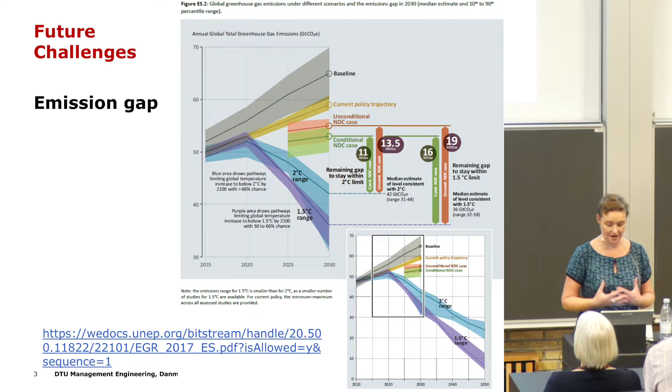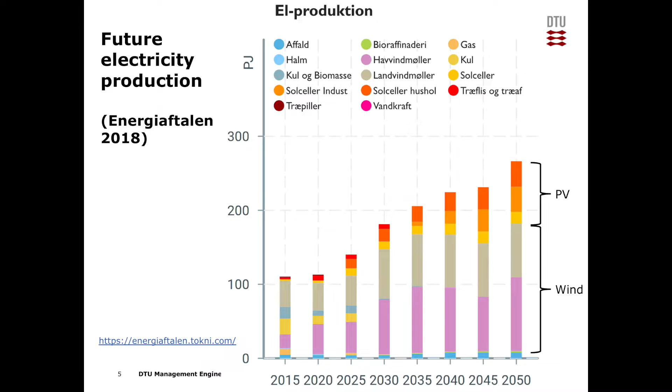When we look into the future, how are we expecting to produce our electricity? This is an example from our group's homepage, showing an analysis of the energy agreement in the TIMES model. What we can see is a lot of wind and also quite a lot of photovoltaics, i.e. variable renewable energy sources that we need to find out how to use.

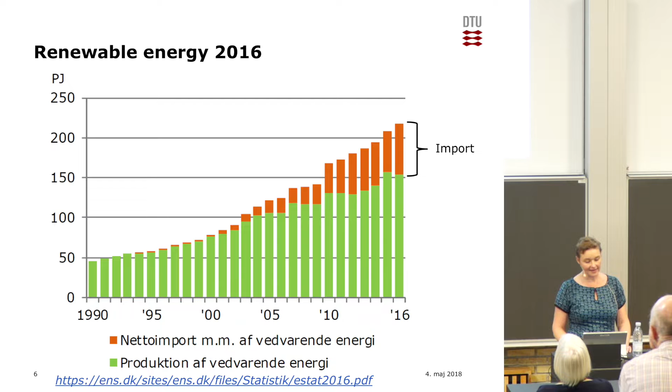Recently, we've seen quite an import of renewable energy sources, as you can see with orange. That is mainly wood. And we have to ask ourselves, is this a sustainable way to go forward? Can we ensure that the wood we are importing keeps on being sustainable also in the future, when other people will get the idea to use wood for their own purposes in their countries?

Turning towards the costs, many different studies have shown that the cost of going towards 100% renewable energy systems is not dramatically higher than the alternative costs if we don't do it. And actually, if we take health impacts into account, it may even be a cheaper solution. But let's just look at the raw costs.

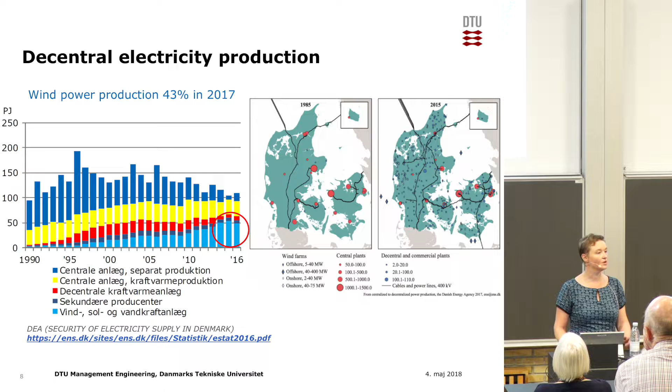I want to highlight a trend that has happened in the different sectors. First, we went decentral with electricity production. What you can see here is the change from 1985 to 2015, where we see a much more decentral production. Today, we have more than 50% produced with decentral plants, and we have a world record in wind power production with more than 40% in 2017 supplied by wind.

If we look at district heating, then we see a similar trend. There's also a very decentral production, with more than 50% produced in decentral plants. And we have another world record: more than 60% of our households are fueled by district heating.

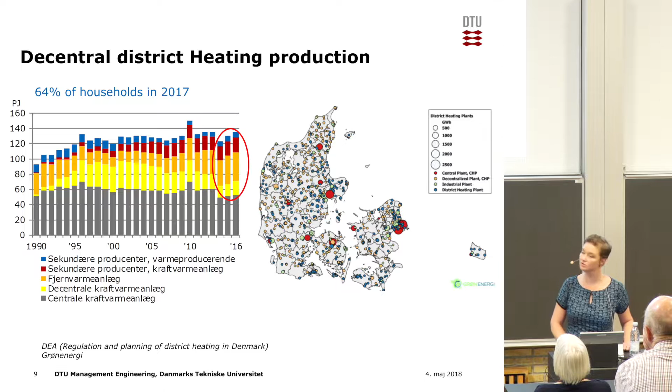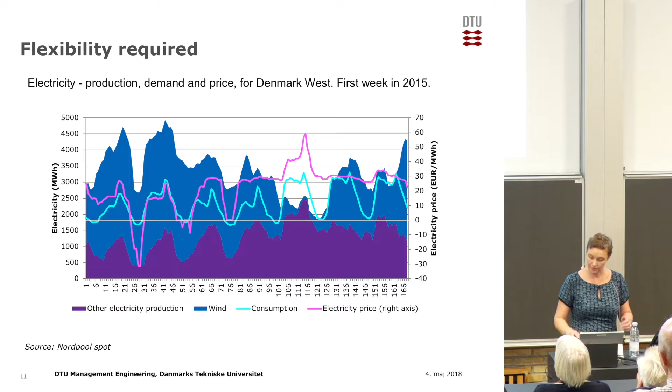In order to integrate these variable renewable energy sources, we require flexibility. This picture illustrates with dark blue the production of wind over one week in 2015, and with light blue you see the consumption. What we clearly see is that production does not match consumption, and we want to have more flexibility in the system in order to manage that.

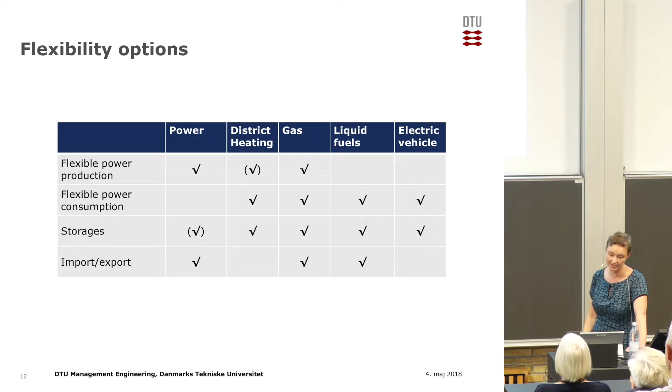We have different options of providing flexibility. We can have flexible power production, flexible power consumption, storage, or import or export of energy. The different sectors provide in different manners on these aspects. The power sector, district heating, and the gas sector can provide quite a lot on these terms, and then liquid fuels and electric vehicles can also provide flexibility on some of these issues.

Now let me take you on a trip of what I've been working with for the last 12 years.

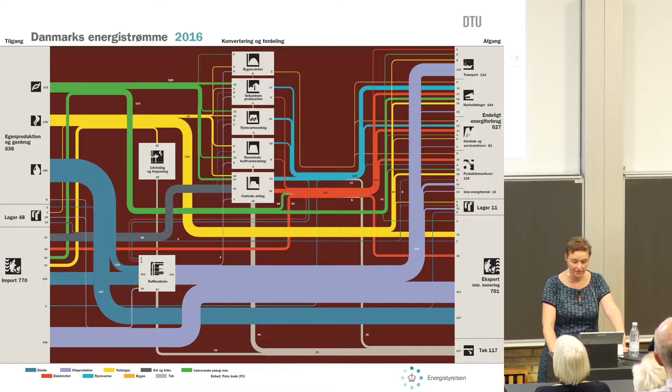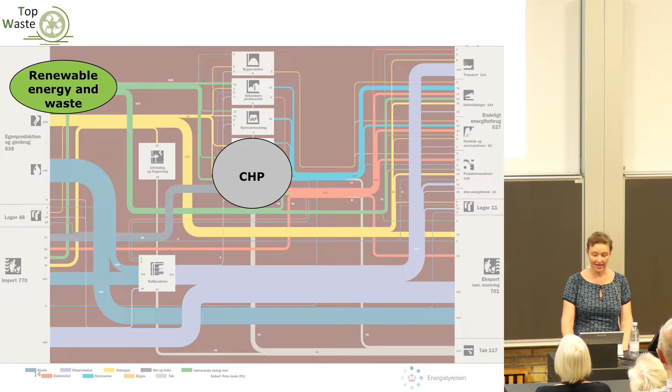Starting by looking at renewable energy and particularly waste, I have been looking at how to convert this into some useful energy, so district heating and electricity, and this has, for example, been in the Top Waste project that I was heading.

Later, I've dived more into district heating in the 4th generation district heating project led by Aalborg University, and in the progRESsHEAT project, which was a European project we recently finished. There we've been looking at the possibility of heat pumps to provide district heating cheaply and by integrating cheap electricity.

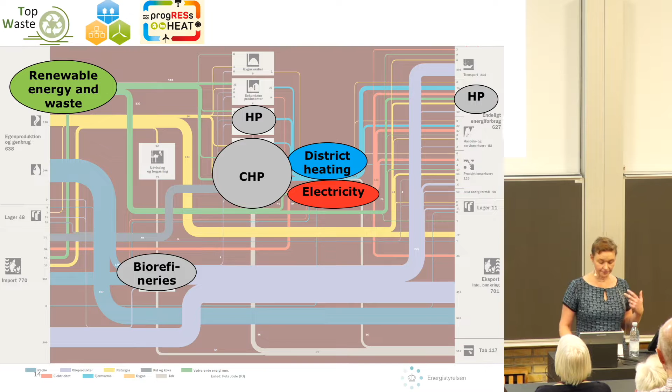Later, I was also looking at how can we convert biomass and waste in biorefineries to feed the transport sector, and this has, for example, happened in the COMETS project.

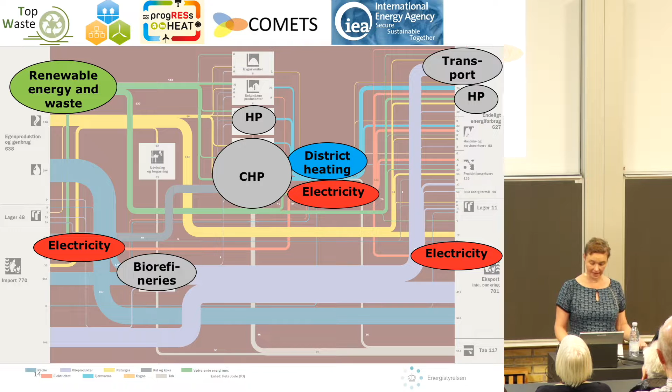And I've been looking at how can we trade electricity, what is the capacity of transmission we need, for example, in the Nordic ETP study done together with the IEA.

And then lately we've been looking into storages and also into gas and production of renewable gas in the Future Gas project. So these are some examples of what have been my focus when we are analyzing the full energy system.

When I came to Risø, a lot of brilliant people were already studying wind power, so that wasn't really where the extra help was needed, so this is where I went.

So how have I been working with this? Basically, you can say I've been doing scenario analysis, applying energy system analysis models, facilitating a dialogue about possible future pathways. So the challenges I was showing you before is that we need to integrate variable renewable energy across energy sectors. We have limited sustainable biomass available, and we need to produce fuel for heavy long-distance transport in biorefineries.

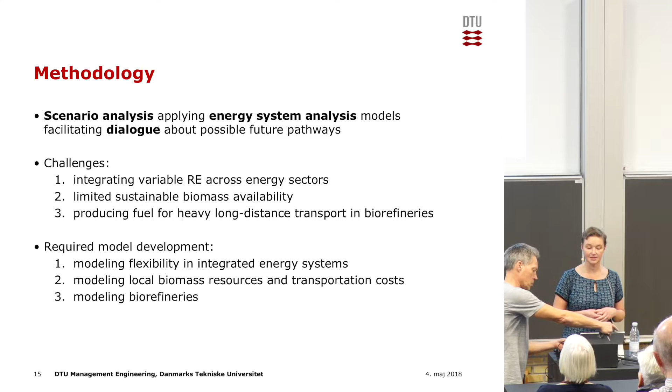So the model development that was required is to improve the modeling of flexibility in integrated energy systems, also modeling the local biomass resources and transportation costs, and modeling biorefineries in a better way.

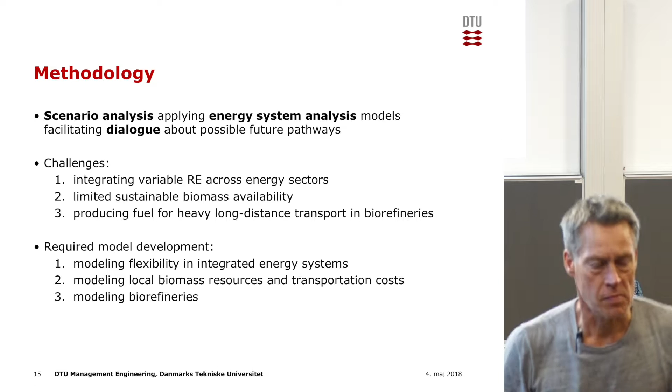So let's start with the scenarios. I like to see them as a set of organized ways for us to dream effectively about our own future. And what they do is they make a dialogue possible. So in Denmark, we have around 40 years of active energy planning, and we've been providing these scenario analysis.

A lot have come from the government, but also a lot have come from NGOs or from universities, thereby facilitating this dialogue. Where should we go?

So do renewable energy scenarios have any influence? Well, lately we've seen a lot of different analyses illustrating that we can go to 100% renewable energy in a Danish context, actually without considerable extra costs compared to a business-as-usual alternative.

And I was very happy the day that it was announced that there was a political target in Denmark to go towards 100% renewable energy in 2050. That was pretty much a milestone in my career.

And I think that all these different analyses that showed that it didn't have to be excessively expensive to go there really helped the politicians dare to make this target.

So, moving towards how am I working with these energy system scenarios? I do energy system analysis, and I like to see it as a way of combining inputs from all the different brilliant researchers I have around me.

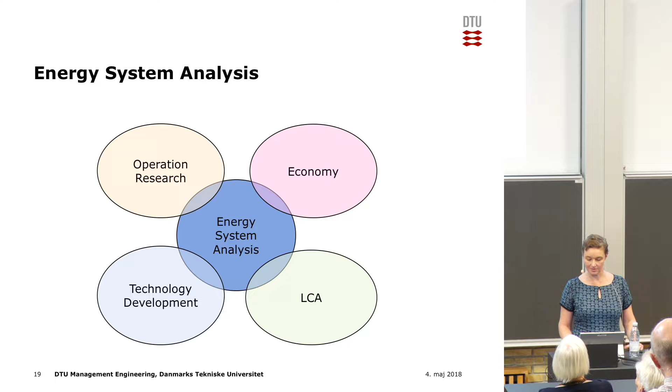And the model I've been mainly working with is Balmorel. It's a model which has been applied at a global scale, but that's not the reason why I chose to work with it.

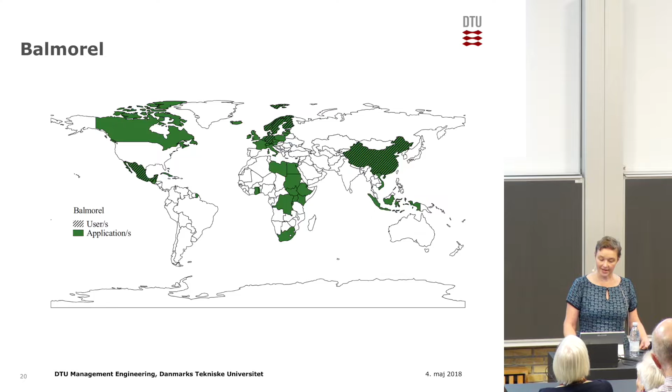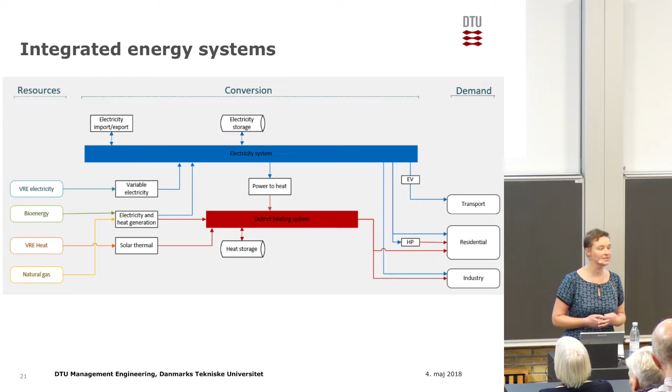I chose to work with it because it was a model that had a good representation of the electricity system and the district heating system, partly in Denmark, but also internationally. It furthermore has the benefit that it can optimize not only operation, but also investments, both in plants and in transmission between these different electricity regions you can, for example, see here.

So what really constitutes such a model, and what is it all about? Well, we can talk about the inputs that we need to the model. These are demands, efficiencies and costs, and also the hourly distribution of demands and potential production from renewable sources. On the output side, what we are optimizing is finding which fuels we are using to produce which types of energy, and where in this system.

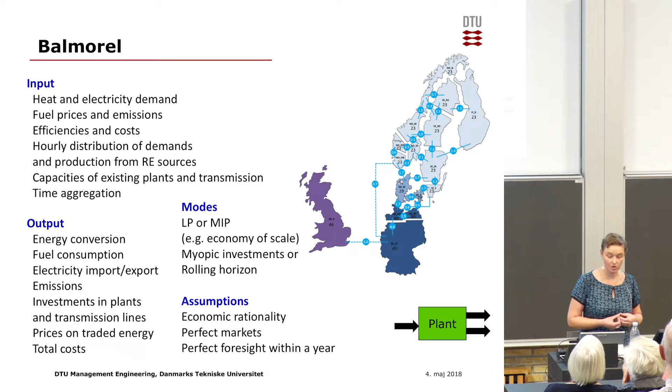The way it works is that we often use it as a linear programming tool, but it can be used as a mixed integer programming tool. For example, when we want to optimize economy of scale, and I'll come back to that, or not optimize, but take it into account. That means big plants are cheaper per capacity than small plants.

We also can use it either with myopic investments or rolling horizon. Myopic investments being we just take one year and we optimize for that year, and we are blind to all the other years around it. Rolling horizon meaning I have an idea what's going to happen five years into the future, so I do my investment and then I have an idea for the next five years, and that way I also reach 2050. This is how we normally run Balmorel these days.

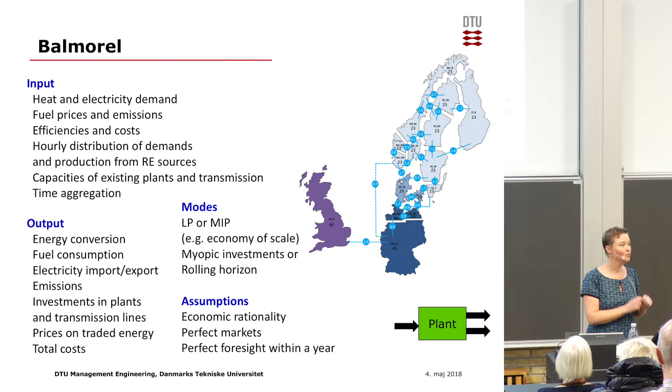Then there are some very important assumptions in this model, and this is why some people love to hate it. What's that? We are assuming economic rationality, we are assuming perfect markets, and we are also assuming normally perfect foresight within a year. That means I know when the wind is going to blow, and I also know when people are going to have their electricity demand, and that's really smart, because then I can make a super optimal system.

Also, economic rationality and perfect markets are questionable assumptions. However, this is not the final answer of how the world is going to develop. This is the first point to put on the table for a discussion to start. This is where we say this could be possible from an economic and from a technical viewpoint. And then, of course, there are human barriers to make that happen, for example.

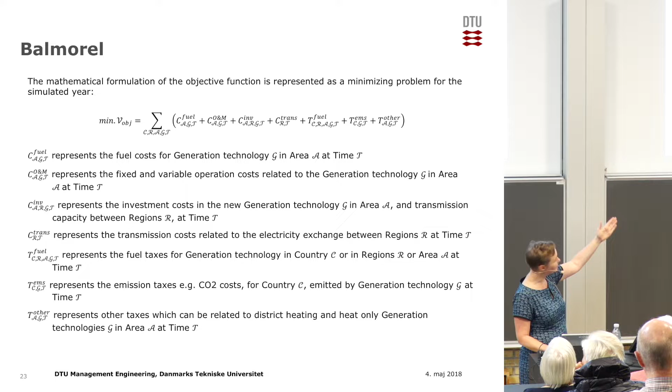So putting one equation on the board today, this is the objective function that we try to minimize. We try to minimize the costs. This could be fuel costs, operation and maintenance costs, investments, or costs within transmission. And this is if we run it in a socio-economic optimization. If we want to include private economic optimization, we can add taxes, for example, on fuel or on emissions, or any other taxes or subsidies.

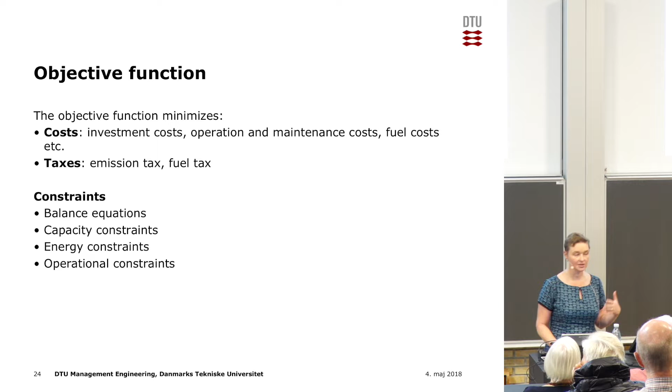So we furthermore have a lot of constraints in the model. We can summarize these into balance equations, which could be for electricity. We have capacity constraints, for example, on power plants. We have energy constraints—for example, we need to use the waste that we produce within a year. And then we have operational constraints, for example, the loading rates for storages.

Then I told you that we had the challenge. We wanted to expand in understanding the local use of biomass, the transport costs related to that, and also how we really integrate these biorefineries, and what are the different types of biomass that we can integrate into them, and how can they produce. And I just forgot a figure here, actually, because down in the corner we have a plant.

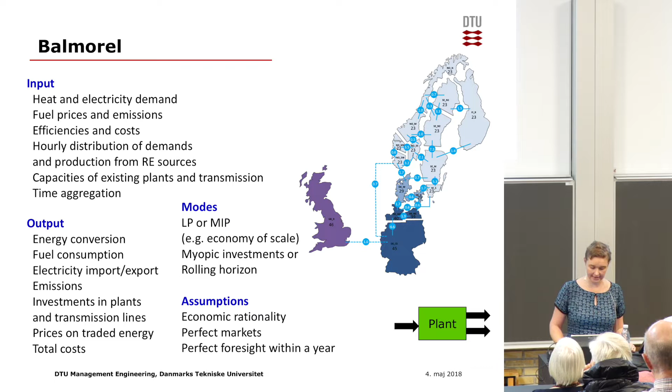Normally in Balmorel we have one input—this could be biomass—producing two different outputs, this could be electricity and heat. And now that we're going for OptiFlow, which was the model we developed in order to take into account this local biomass, what we can then facilitate is we can have multiple different biomasses going into a plant and multiple different outputs. This could be fuels together with electricity and heat, or also fertilizers.

The additional inputs we need are a detailed spatial distribution of local biomass resources, heating demands, excess heat sources, also possible transportation routes, the costs, and so on. And then what we get out is how much biomass we are really using from where, and how it is transported.

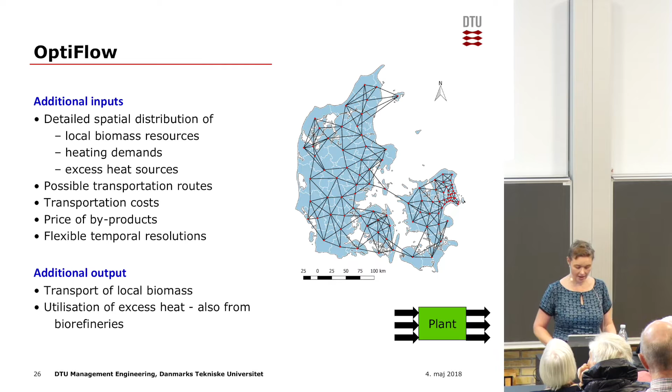So what we add to the objective function is the cost of transport and also flow constraints, for example moving from area A to area B. And on the spatial resolution, we're now hard linking Balmorel and OptiFlow.

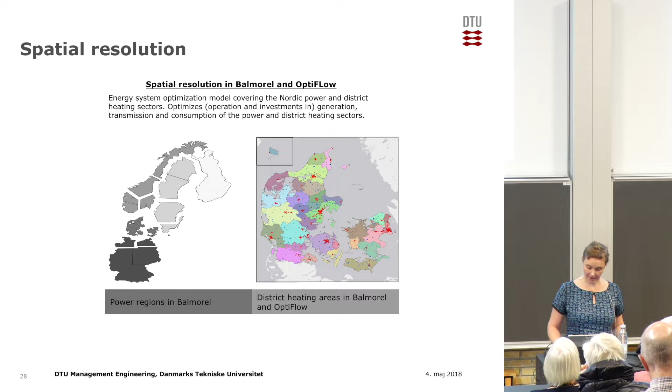The spatial resolution in Balmorel looks at Denmark and the surrounding countries with electricity regions. In OptiFlow we have 36 different district heating areas and 98 municipalities we can drive biomass between. We have an overview of the resource potentials.

Here's the manure potential in total, 38 million tons, mainly positioned in the west of the country, and straw potential around 55 petajoules we've used here, mainly in the east of the country.

So that was the methodology and the challenges, and now let's dive into the fun stuff, which is what can we really use this for, and let's look at some results.

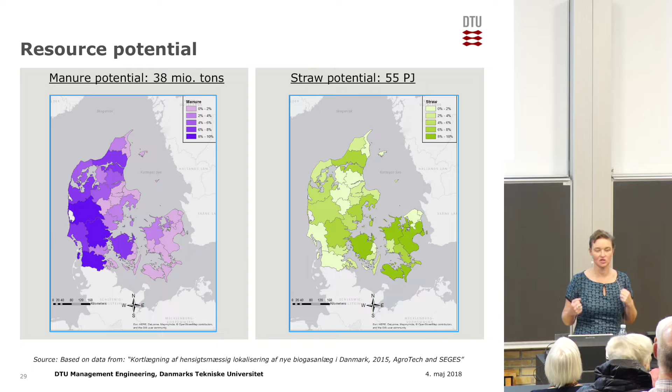The first example is on import of waste. This is a study I've done with my PhD student, Amalia Pizarro, and also some colleagues from the Southern Danish University, and Chalmers, and Hans Ravn.

First of all, we looked at the economic value and then at the climate footprint of importing waste. What we saw was a huge increase in the import of waste to Denmark, mainly from United Kingdom and Ireland, more than 300,000 tons.

We were asking ourselves, is there a raw socio-economic benefit of doing this also in the future? And is there a climate benefit of doing it? Two different questions. When I say raw socio-economic benefit, I mean we are only looking at the pure costs, not taking externalities into account.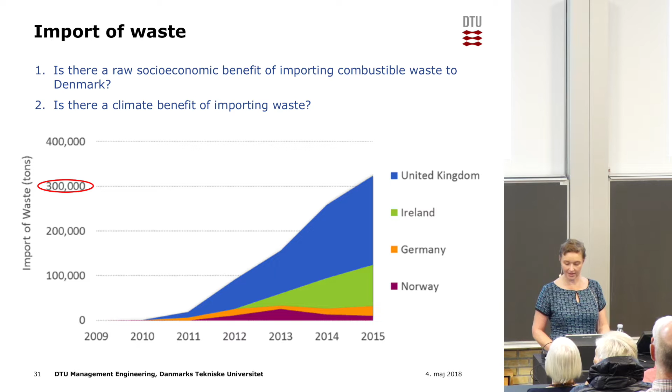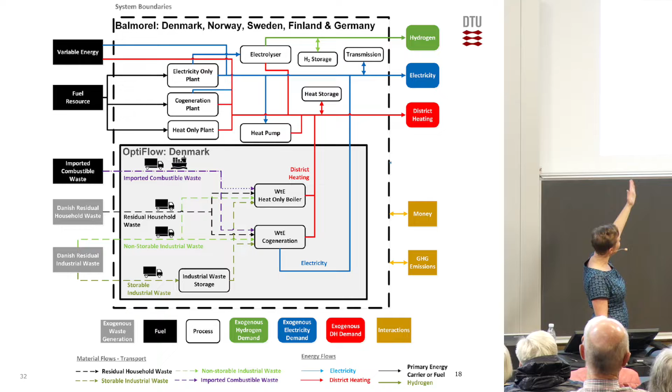The only externality we take into account is in the second study where we look at the climate benefit. The way we've used these two models together is that for OptiFlow we've optimized the transport of waste, and then optimized the use of waste to energy. Balmorel has handled the rest of the energy production, the energy conversion, in the surrounding countries and in Denmark.

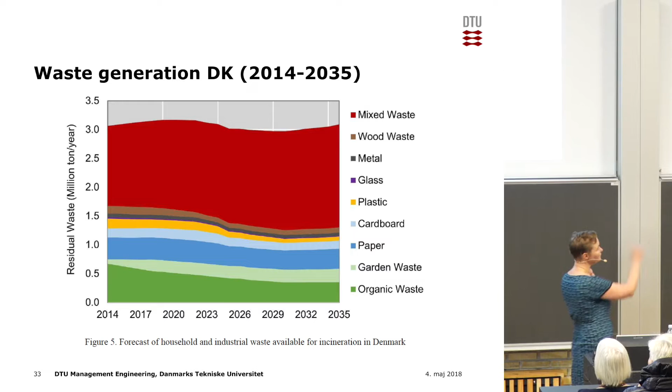We started by looking at how much waste will be available in 2035. This is a strange picture because if we look at economic growth, the amount of waste will increase. But when we add the recycling targets, we actually end up with the same amount of waste for energy purposes as we have today. That's really upsetting, but that's the best analysis we could do based on the models we have available and the historical development.

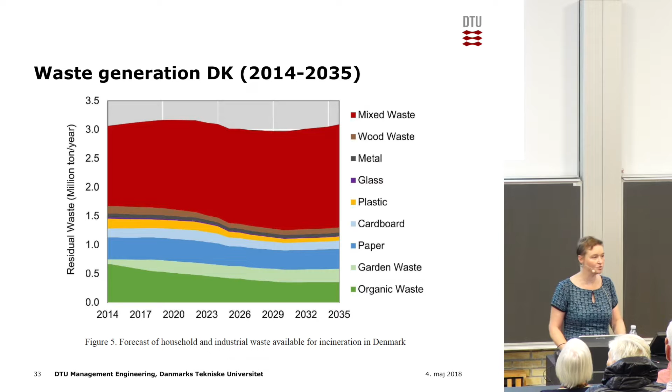I'm really sorry, but at the moment it looks very difficult to achieve zero waste growth, meaning we'll have the same amount of waste then as today. I hope somebody will do something about minimization and recycling of waste, but so far, not that much.

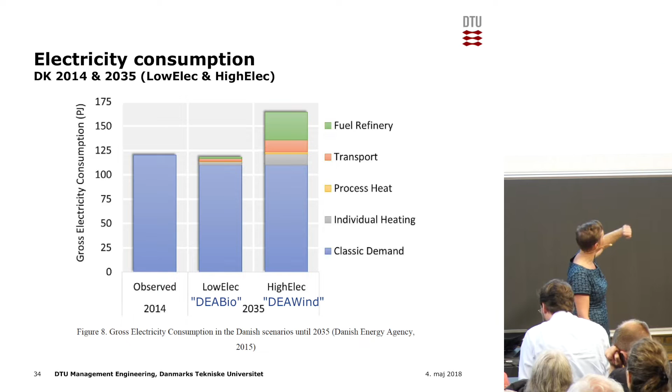We've looked into two different scenarios for the future. One we call the low elec scenario, because it doesn't have such high electricity consumption; it's based on the Danish Energy Agency biomass scenario, where we allow some import of biomass. Then a high electricity scenario, which equals the Danish Energy Agency wind scenario, more or less.

These two scenarios are both net zero scenarios, excepting the waste -- this is always the case. We can get to zero carbon emissions, but it's very difficult to get rid of the fossil content in the waste.

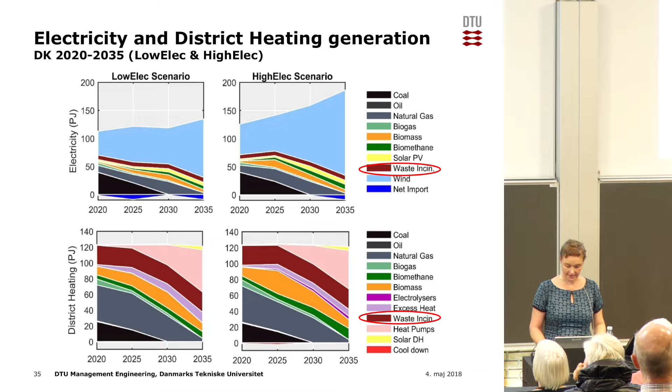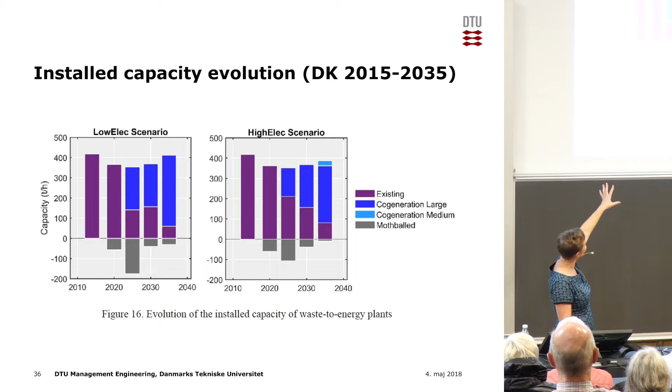We also see some plants being mothballed, meaning they're not decommissioned due to age, but mothballed because they're not that effective. The difference between the low elec and high elec scenarios is mainly that we mothball more in the low elec scenario, and have more central units, while in the high elec scenario we have a bit of decentralized units too.

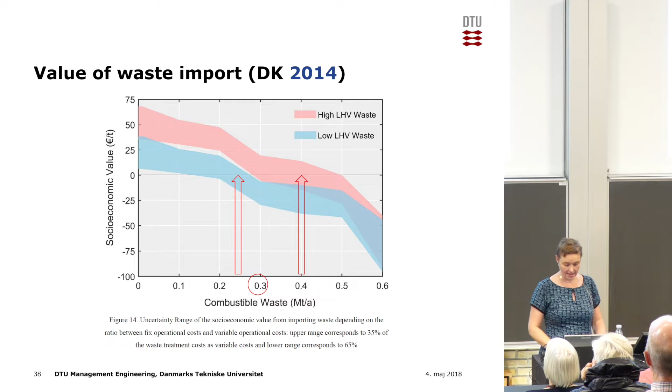This is today. We looked at two different types of waste, a high value waste and a low value waste. We can see that it's feasible to import up to 250,000 tons of low value waste and up to 400,000 tons of high value waste. The circle shows where we were in 2014, so it doesn't really look that crazy today. It's not a bad business for Denmark.

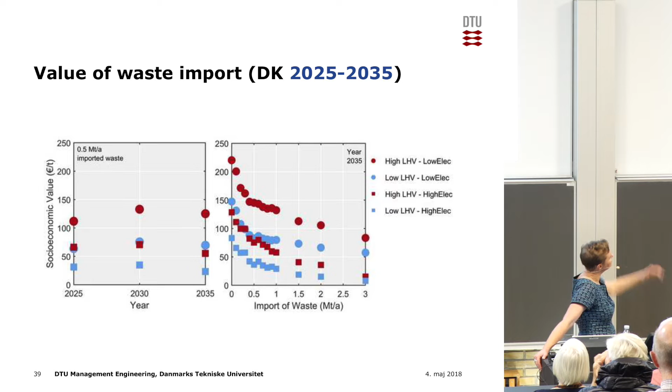Looking into the future, will it keep on being a good business? If we look at the development over the years, yes, there is a positive value, particularly if we're importing high value waste into a low elec scenario. If we look at the amounts, we can see we actually have a positive value of importing up to 3 million tons per year, even in the worst case where we have low value waste in the high elec scenario. But we also see that the value decreases heavily the more we import.

So a conclusion is that waste incineration seems to be moving towards centralized combined heat and power. This is, however, sensitive to electricity prices, so with other electricity prices we may see that we go more for heat-only plants.

It has a positive socioeconomic value to import waste also in the future. Imported waste would have a higher value in the low elec scenario as it displaces more expensive district heating generation, and the feasibility from import of waste will highly depend on the price for wood pellets, because wood pellets is one of the competing technologies to provide the same energy services. I'll come back to that when we look at biomass, because biomass is a competitor to waste in the Danish energy system.

So if I have to answer the question, is there a raw socio-economic benefit of importing combustible waste to Denmark today and in the future? Yes, there is. But you have to make sure that it may not be a good idea to import a lot if you are planning for a high elec scenario. And also you should plan for other heat generation in decentralized district heating grids.

Now the next question, is it also a good idea from an environmental perspective? And we can't wait for the answer for that, right? No, this is a bit a complicated picture, but let me take you through it.

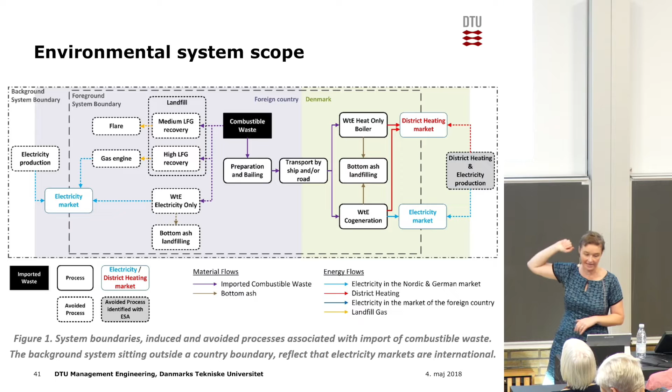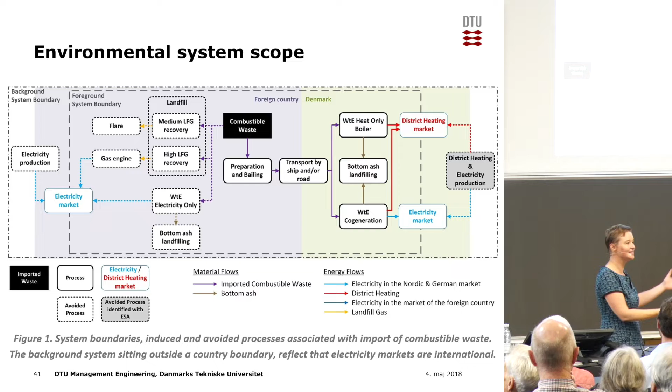So what we have is combustible waste abroad. We can prepare it and bale it, and we can transport it by ship or road, and then we can use it for heat only or for cogeneration to provide electricity and heat, and then we're displacing something else in Denmark. We would be producing that electricity or heat in another way in Denmark if we didn't use waste for it.

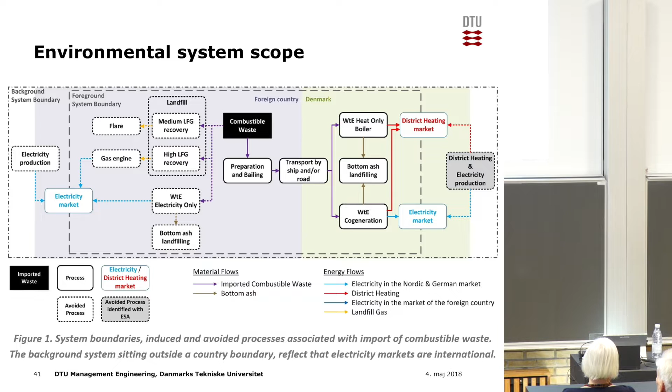And then abroad, if we don't take it to Denmark, what would happen with it? It could either go to a sanitary landfill with medium landfill gas recovery and be flared, or to an engineered landfill with high landfill gas recovery, go into a gas engine and produce electricity, or we could burn it for electricity only. We are assuming that it does not make sense to export waste from a place where you already have district heating and waste incineration. So these are the options we're looking at.

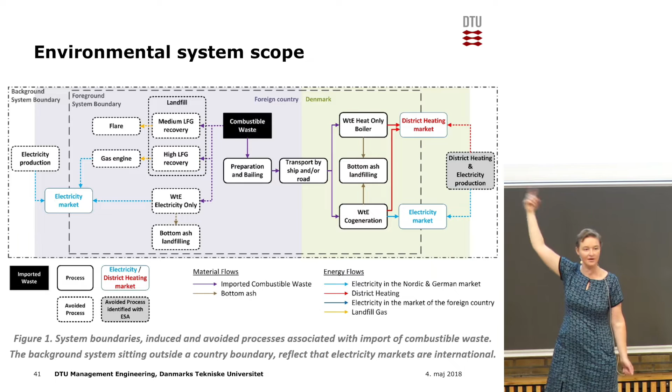And of course, the electricity that you would be producing would have to be produced in another way if you didn't burn the waste, and we're looking into that. So for the district heating and electricity production in Denmark, we're using our energy system models to identify what we're displacing. Abroad, we don't have that pleasure, but we will look into different scenarios, which could be more or less carbon-intensive.

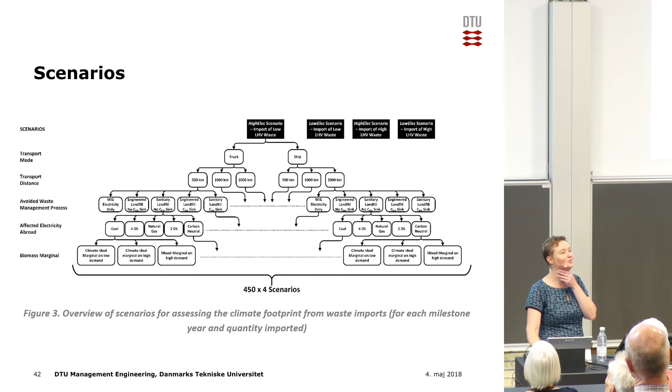So coming to scenarios, this is the amount of scenarios we looked at. I say we, Cyprian is actually in the audience, Amalia is in Mexico, but Hansen's here as well. So what we looked at was the Danish energy system and the waste quality.

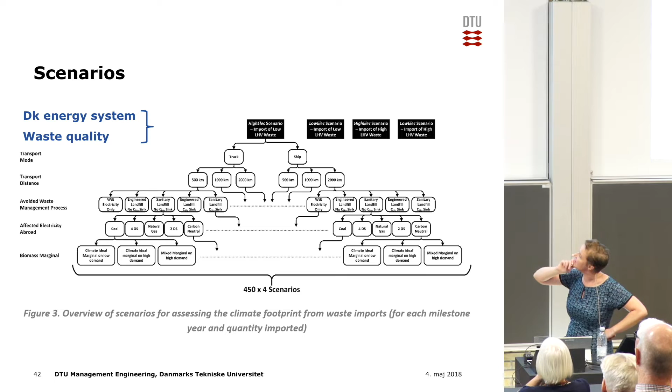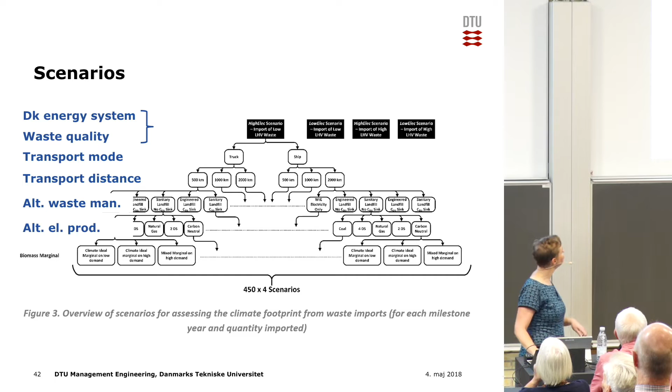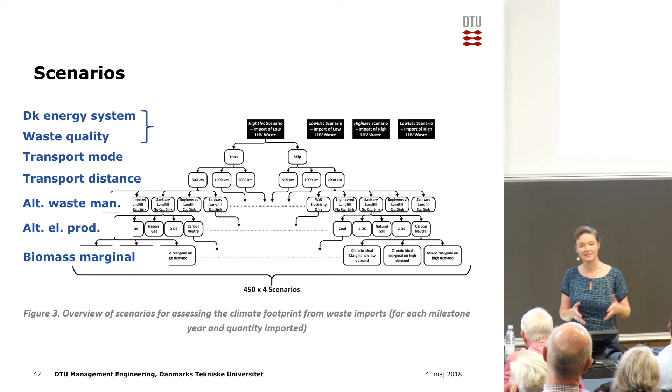That's what I've been talking about the last 10 minutes, so you get that. Those 4 scenarios. Then furthermore, we're looking at different transport modes, different transport distances from 500 to 2,000 kilometers away, different alternatives to waste management, and different alternative electricity production abroad, 5 different scenarios, and then the biomass marginal. So as I told you, we may displace some biomass in Denmark if we import more waste into Denmark. That biomass can be more or less sustainable, and that's what we've been looking at.

So all in all, 450 times 4 scenarios. Doesn't look like too much. I didn't do it, Cyprian did.

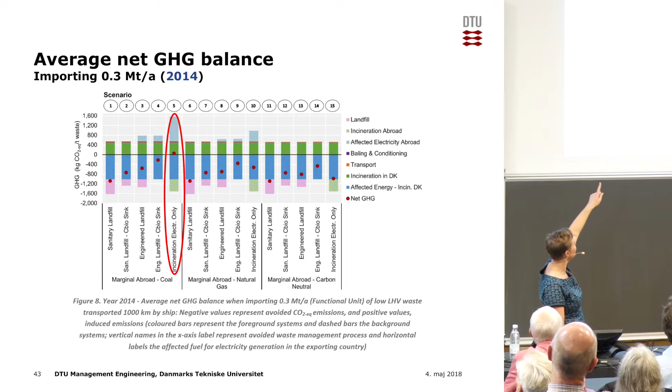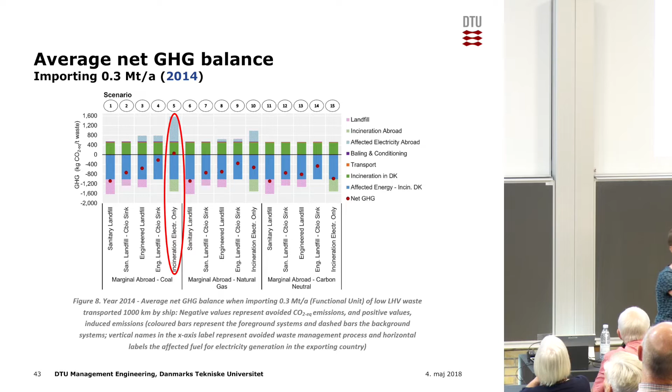Okay, so is it a good idea from a climate perspective to import waste to Denmark today? Well, all the red dots below the line says yes. There's 1 dot above the line, so that is the one scenario in which we can say no, because if we burn waste abroad and we displace some electricity produced on coal, then it's better just to leave the waste there, it does good use there. In all the other cases, it's actually a good idea today to import the waste to Denmark.

Okay, this now is the confusing slide in my presentation. And what you need to see is that the benefit is when we are within the red circle. So this is the good stuff. And all outside is the bad stuff.

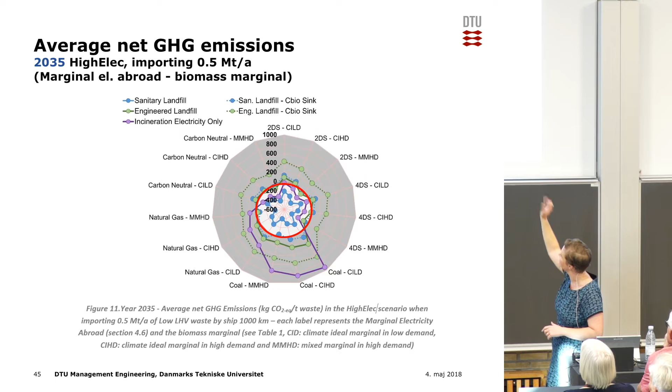So what we see is these blue dots from sanitary landfill. If we import waste, which would otherwise be put on a sanitary landfill, then yes, good idea, let's import waste also in the future. But if we say that that sanitary landfill actually captures some biogenic carbon and keeps it there more than 100 years, then it's kind of not that good an idea. You can see the blue, it's kind of hitting the red line.

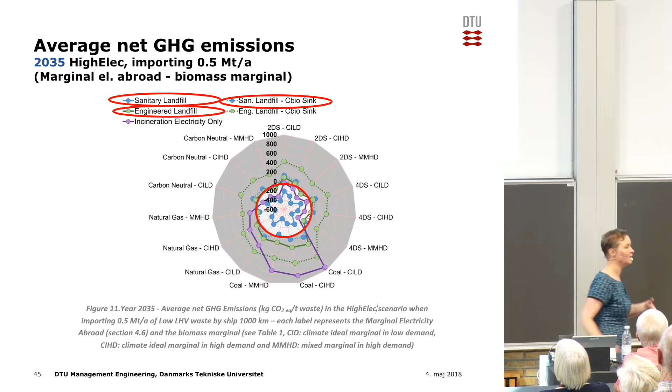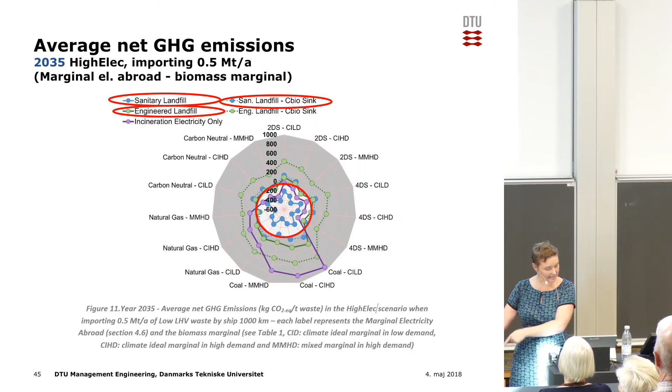And similarly, if we have an engineered landfill where we use the gas to produce electricity, then it's also kind of dubious if we are not accounting for the biogenic carbon sink in the landfill. But in some instances, we can see there's actually a bit of cases where we have a positive benefit.

And if we focus on those cases, those are the cases where we have a mixed marginal in high demand. That's the biomass marginal, which is the worst biomass marginal. So everybody is using biomass and we just have the non-sustainable biomass left, and we are displacing that in Denmark, then it might still be a good idea to import to Denmark.

Finally, if we look at an engineered landfill where we take into account that carbon is stored in the landfill, that is under all circumstances the best idea.

And then we have a few situations where if we incinerate electricity only, it actually also becomes positive. That's the purple dots. And what you see is that if we incinerate the waste to produce electricity, which displaces green electricity, then yes, let's move it to Denmark. If we have a situation where that electricity is displacing fossil, then leave it there.

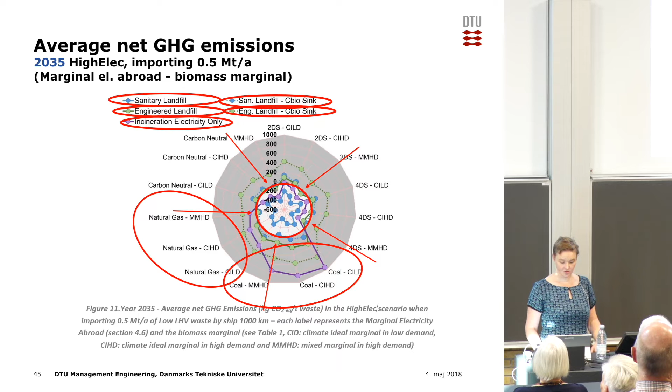So, summing up, mixed combustible waste may pollute future clean energy systems, either in Denmark or abroad, but if we have an equal level of low carbon energy systems, it's better to incinerate in Denmark where we can utilize the heat. The energy displaced, whether we import to the HighElec or the LowElec scenario in Denmark, has a higher impact on the balance than the quality of the imported waste.

Then you saw that sustainability of biomass also has an impact. And, well, leaving the waste at an engineered landfill with a good extraction of the landfill gas and a use for electricity production, where we also take into account that the carbon stays in the ground, may be the best option. But furthermore, it's a good idea to look into other environmental impacts. There may be other reasons to export than just the climate issue.

So overall, is there a climate benefit of importing waste? Today, yes. In the future, not really necessarily. So basically, don't build excessive amounts of capacity in order to import waste for climate reasons. And only import waste if, one, the alternative waste management will be at a sanitary landfill with poor landfill gas recovery, or two, local incineration would displace green electricity, for example from Norway.

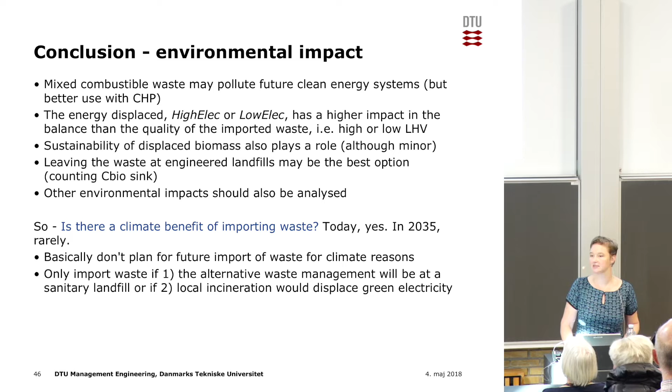Whoa, I just need a drink.

Coming to the next example: renewable gas production. This is work which I've mainly done with my PhD student Rasmus Bramstoft. It's work in progress, but Amalia has also been involved here, and so has Ida, and again we see Hans.

So what we've been looking at is renewable gas production. What we're expecting in the future is a decrease in the consumption of gas, but maybe particularly within individual heating, and maybe an increase in transport. So we thought it was interesting to identify the cheapest options for producing this renewable gas and liquid biofuels in the future, and which local biomasses will be feasible to utilize.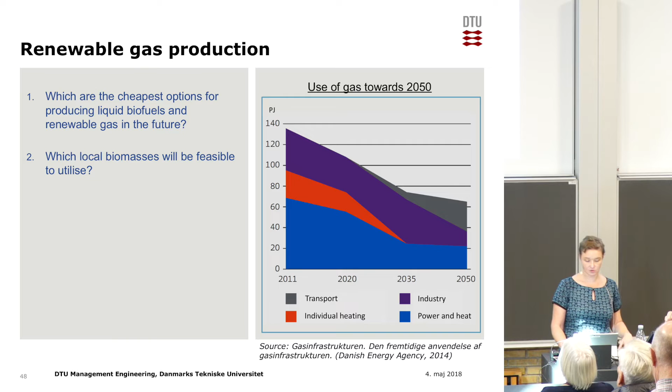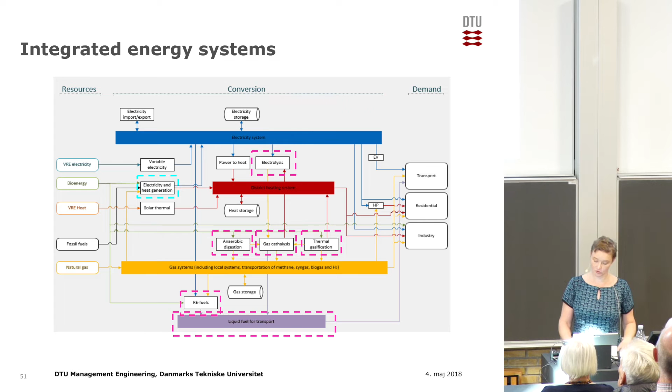We modeled - you don't have to read all this, but it's just to show that it's a bit complicated - many different options of producing liquid fuels and gas.

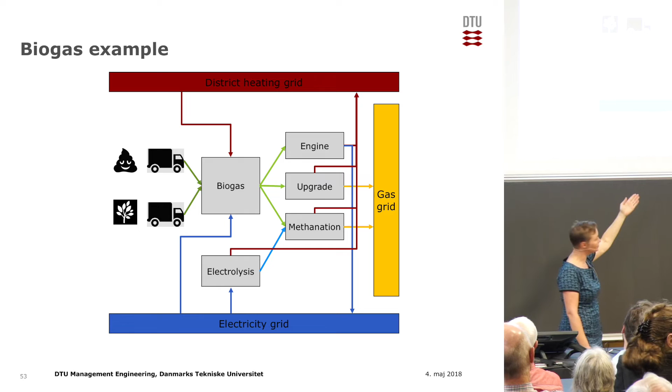Zooming into how we did for biogas, you can see that we have different types of biomass which we can transport at different costs into a biogas plant. Then the biogas plant produces biogas which can either be used raw in an engine to provide electricity and heat, or we can upgrade it by removing CO2 and enter it into the gas grid, or we can have even more if we combine it with hydrogen from electrolysis, goes through a methanation process, and then we enter it into the gas grid as biomethane.

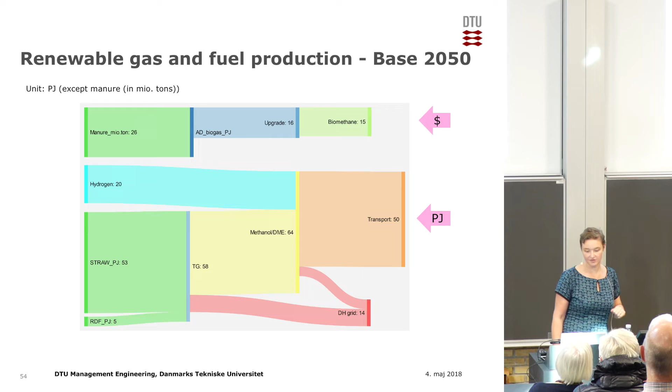And we see that in order to provide around 50 petajoules of liquid transport fuel, we use 53 petajoules of straw and some refuse-derived fuel in a thermal gasification plant, and then together with hydrogen we have a production of methanol which supplies these 50 petajoules of liquid fuels. We also have a district heating production to the grid because we have excess heat from the biorefineries.

And then we looked at what it means how high the gas price is in the base scenario. We had the 15 euro per gigajoule, then in a high gas price we have a 20 euro per gigajoule scenario. And what we see is that we have an increased use of biomass.

We have wood waste that we are taking in and converting to syngas in a thermal gasification plant. And then we have additional hydrogen we add into the system in order to have methanation of both the biogas and syngas to produce more renewable gas for the grid. So this small change in price is quite important - the system is very sensitive to the gas prices that we will see in the future.

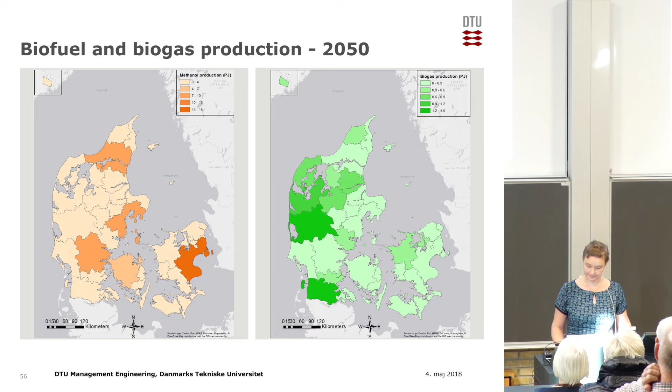So concluding, which are the cheapest options for producing liquid biofuels and renewable gas? Well, thermal gasification of straw with subsequent conversion to liquid methanol. If this technology is available at the cost and efficiencies which my beloved colleagues in chemical engineering are telling us, then that seems very promising.

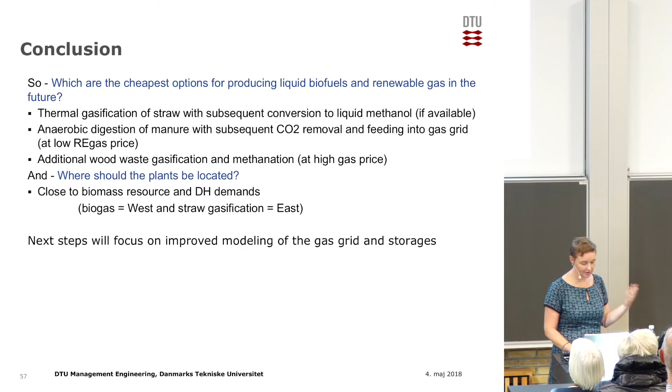Furthermore, anaerobic digestion of manure with subsequent CO2 removal and feeding into the gas grid with low gas prices, whereas additional wood waste, thermal gasification and methanation at high gas prices. So quite a change. And where should the plants be located? Well, this obviously depends on where the resource is and where we can also utilize this excess heat.

Next steps: we're looking into improved modeling of the gas grid and storages in the Future Gas project. So, future development.

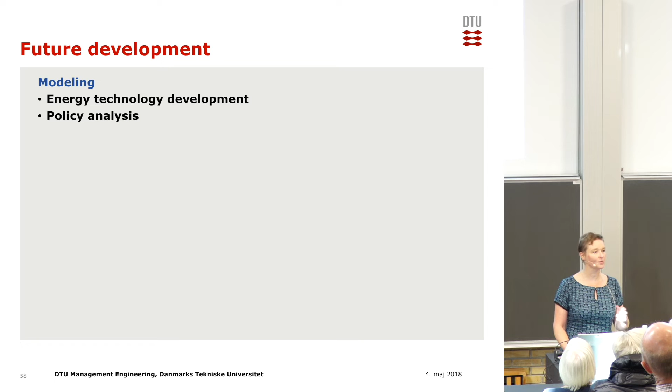Well, first of all, within the modeling, I think there will come more interesting energy technologies we have to look at. It could be interesting to include learning curves and analysis of the different technology readiness levels that the energy technologies have. We want to supply more policy analysis, working with our colleagues, the economists.

We want to look into uncertainty. We are currently working on it with the scenarios. As you saw, we're starting to look into global sensitivity analysis and Monte Carlo simulations. There's also the option of looking into stochastic programming and optimal control approaches. This is all in order to take into account that we don't really know how the future is going to look.

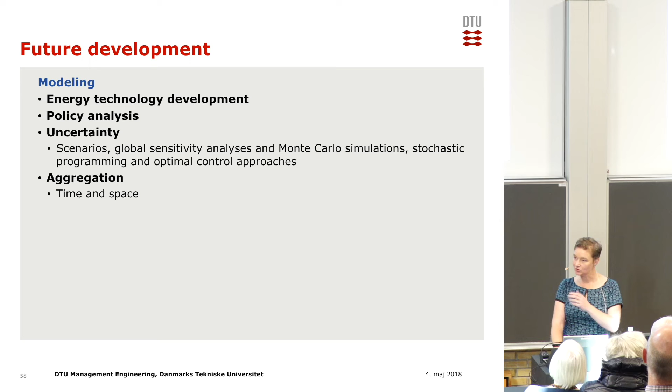We have to look into this in robust ways to give robust decision support for politicians, but also investors. We want to look into what it really means, how we are aggregating time and space, how important is it, and what does it mean for our results. We're doing that with our operations research colleagues.

And then, apart from climate, I showed you today we've started looking into biomass sustainability and energy consumption abroad of products, or alternative uses of fuels. I think maybe water consumption and critical resources will be things we might need to look into in the future. So more work also with our LCA colleagues.

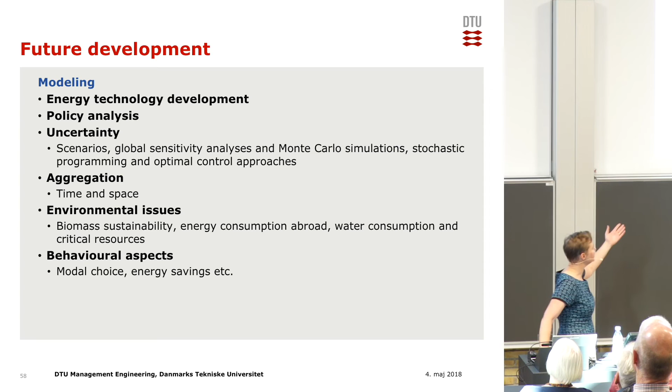Another issue is behavioral aspects. We've started looking into that a bit in the transport sector, with modal choice and the travel time budget in the TIMES model. But we're also bewildered by the fact that energy savings are so socioeconomically feasible, but they're not really happening, and we need people to tell us why not, because our models say it's very feasible.

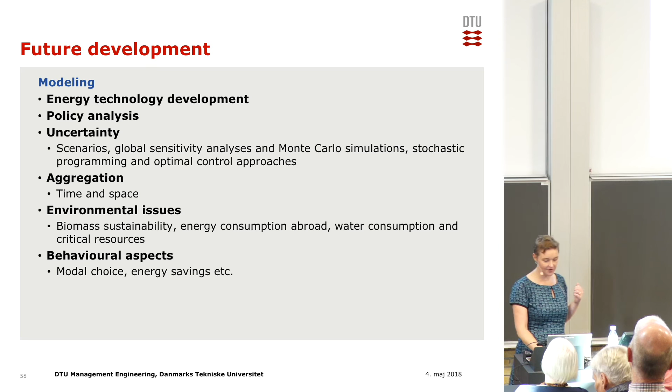So the good news is we're going to have even more cross-disciplinary cooperation with all these brilliant colleagues around.

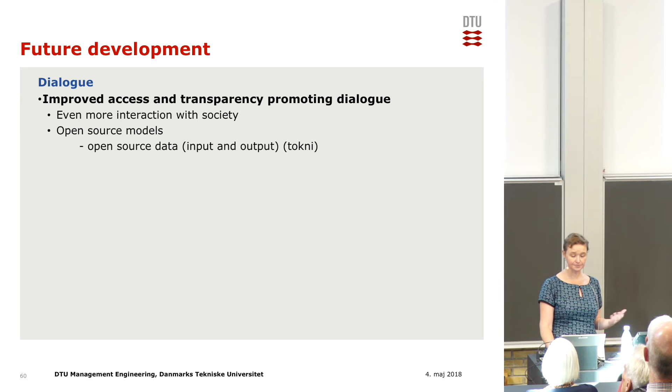Furthermore, it's very important to me that we improve on the dialogue. I think we should improve the access and transparency, promoting this dialogue. We should have even more interaction with society. We should have open source models, both on the data side, on the code, and maybe also on the programs. We should provide online courses. We've started with Balmorel, maybe we'll do it for TIMES too, an open course.

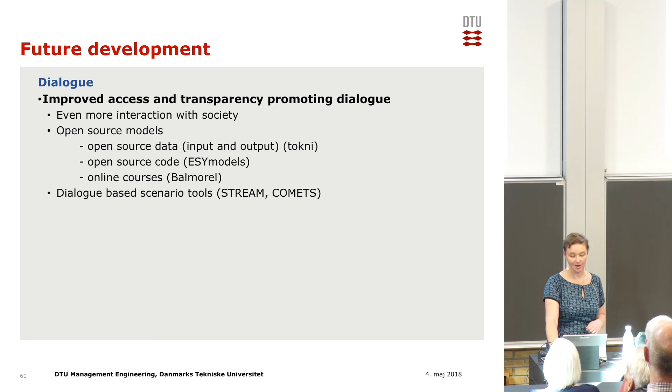And then I think we have to continue working with dialogue-based scenario tools. We're doing this with our small STREAM tool that many of my students will know. We are also in the COMETS project working with a dialogue-based scenario tool. You'll have to ask my PhD student about that.

Well, if you want further information, please go to my homepage. Most interestingly, all the PhD projects are linked there, and there's these brilliant young people. First was Karsten Hedegaard, Christoffer Lytke Jørgensen, and then Ida Græsted Jensen, who all finished. And then we're still waiting for Amalia and Giada, Rasmus and Sarah to also finish their PhD journeys.

But of course, this is some of my most important work, working with these brilliant young people, and also one of my biggest privileges. Please go to our model homepage where we do supply open source models, and also check out we're working on commenting on the climate agreement with our models, saying what is really the impact of the initiatives the government is suggesting. And of course, I have an email address that you're all welcome to send me your brilliant ideas to.

I always say that working in this division is like working in a candy store. There's too many different goodies to choose between - projects, courses, it's super interesting and really difficult to choose. And of course, one of the reasons why it's so fun is all the brilliant people I'm working with. So thanks, before I forget it, to my PhD supervisors, both formal and informal.